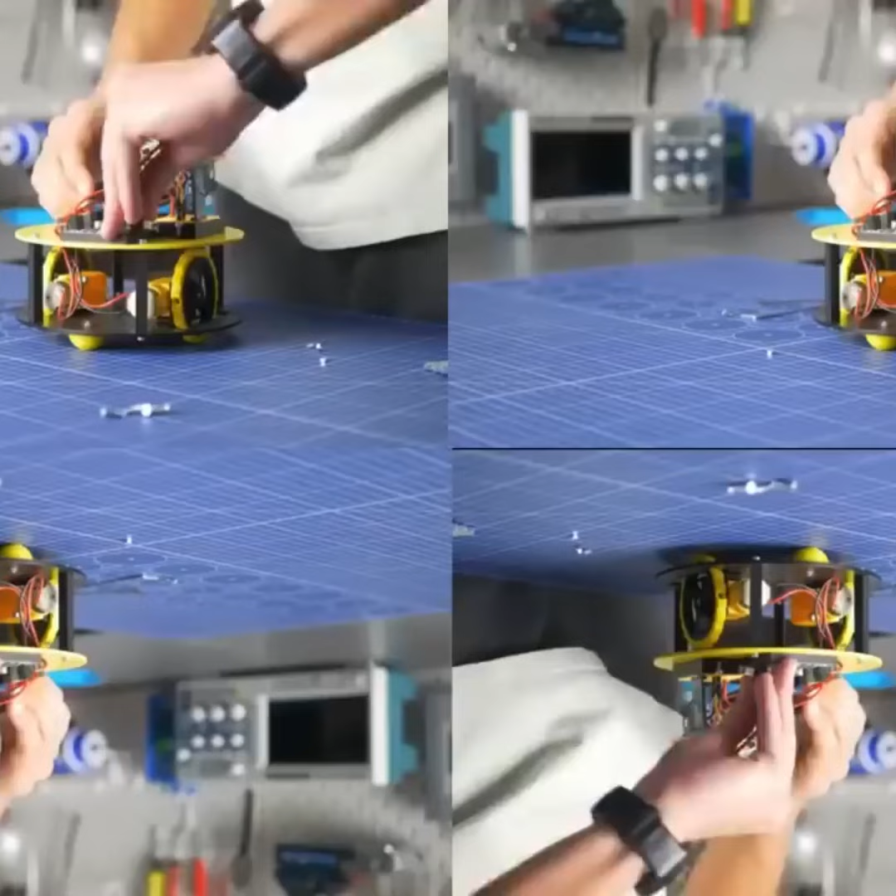I have an idea. What if I grab a robot, put a Raspberry Pi on top with a camera, and connect to ChatGPT API, sending images to ChatGPT every few seconds? ChatGPT should reply with comments on how to control the robot and what to do. The goal of the robot will be very simple: explore the world and survive at any cost.

What will happen? Will it work? Will I simply build a Terminator robot that will exterminate all of us? I don't know, but I have to try it and see how it works. There's a chance no one did that before and gave ChatGPT a real physical body.

This is the Raspberry Pi. It's a complete single board computer the size of a credit card, and I installed Ubuntu on it with Docker so that I can run anything I want in the future for the robot.

I'm not even going to pretend that I'm tired from programming, because most of the work has been done by ChatGPT so far. It created for me all the Python files, the Docker file, and then I just uploaded it all to GitHub and then downloaded it to the Raspberry Pi from GitHub.

I will try to make it remote controlled so that I can, through the terminal with the arrows or keys, control the robot and will connect all the electronics, see if it works.

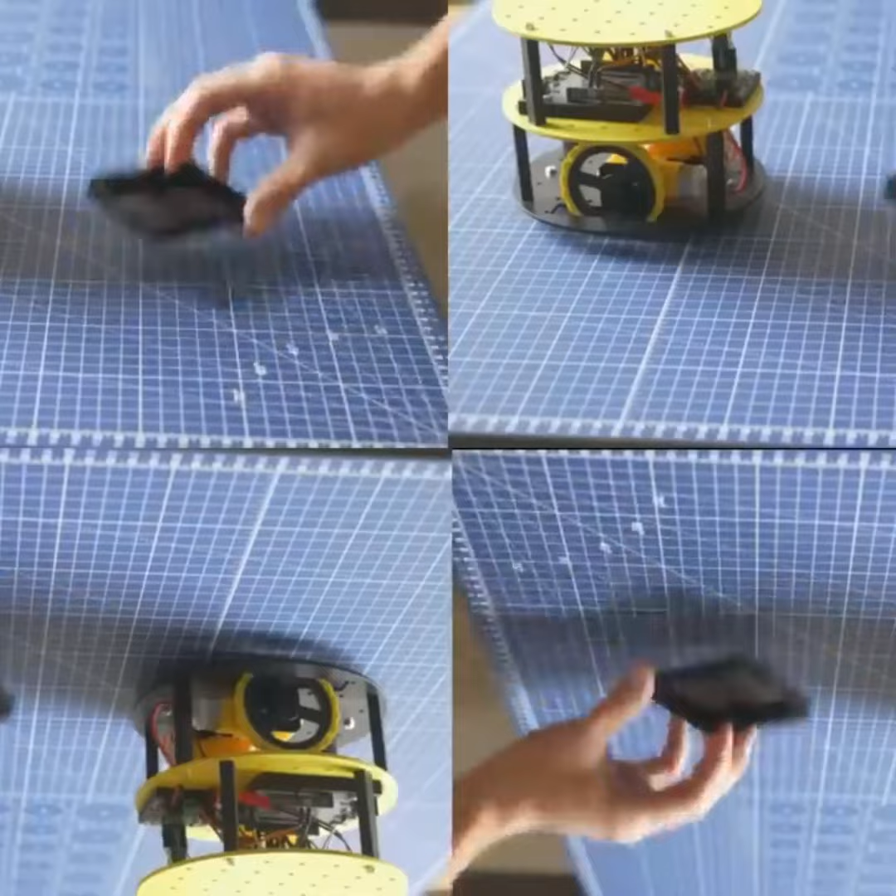And for the body of the robot, I'm gonna use an ORP chassis. Open Robotic Platform is an open project that I created, and together with my friend, we made this cool website where you can just search for parts, download them, and print without any designing. So this is what I did with this Raspberry Pi holder. Check out the design rules, design your own parts, and share them with the community at openroboticplatform.com.

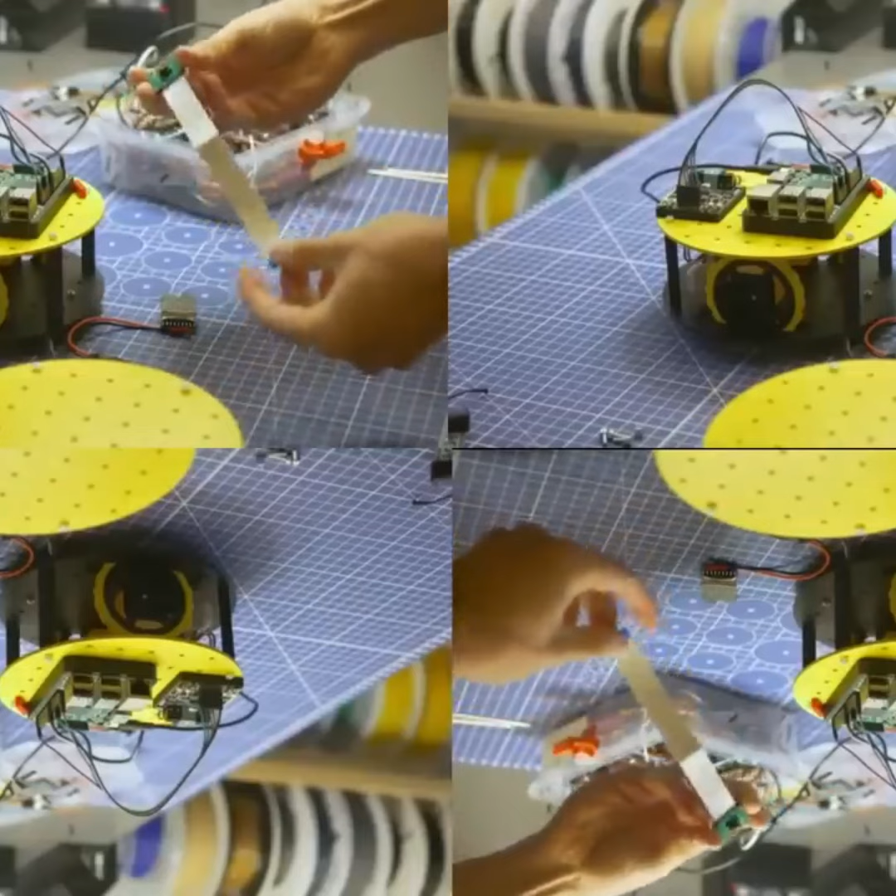This is the Raspberry Pi camera that I have had for like 4 years and I have never even used it once, so...

Okay, I just provided all the information, all the programs that were working, and I fixed myself to the ChatGPT. And now it should just generate everything and I will paste it, upload it to the Raspberry Pi, and hopefully we'll get the first image uploaded to the OpenAI API.

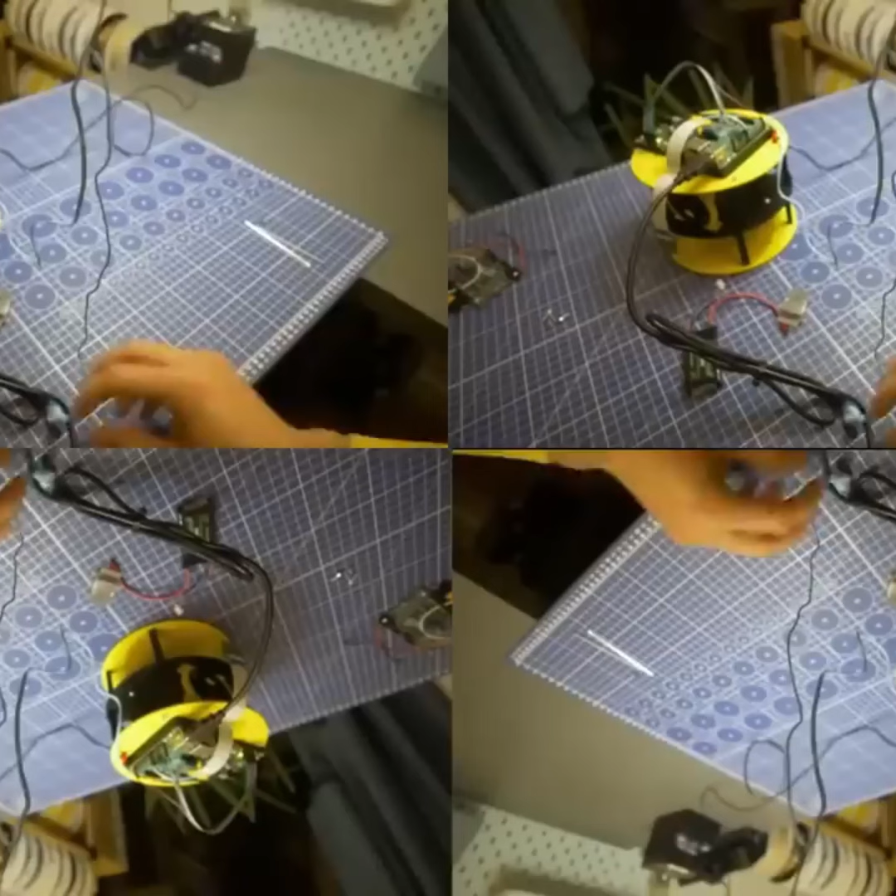And we have an error. Wow, it totally worked. A big part of this project was reading out loud the description generated by OpenAI, and earphones worked for me but not for the camera, so I bought these $5 speakers - way too big, way too crappy, but good for the robot.

We should finally be able to hear the robot, so let's put the speakers there and let me run the script. Yes, it works! The camera sees a very bright scene with limited details. There is a desk with 2 monitors and some indistinct shapes in the background, but the image is mostly washed out by brightness. There's sunlight coming through this big window, so that makes total sense.

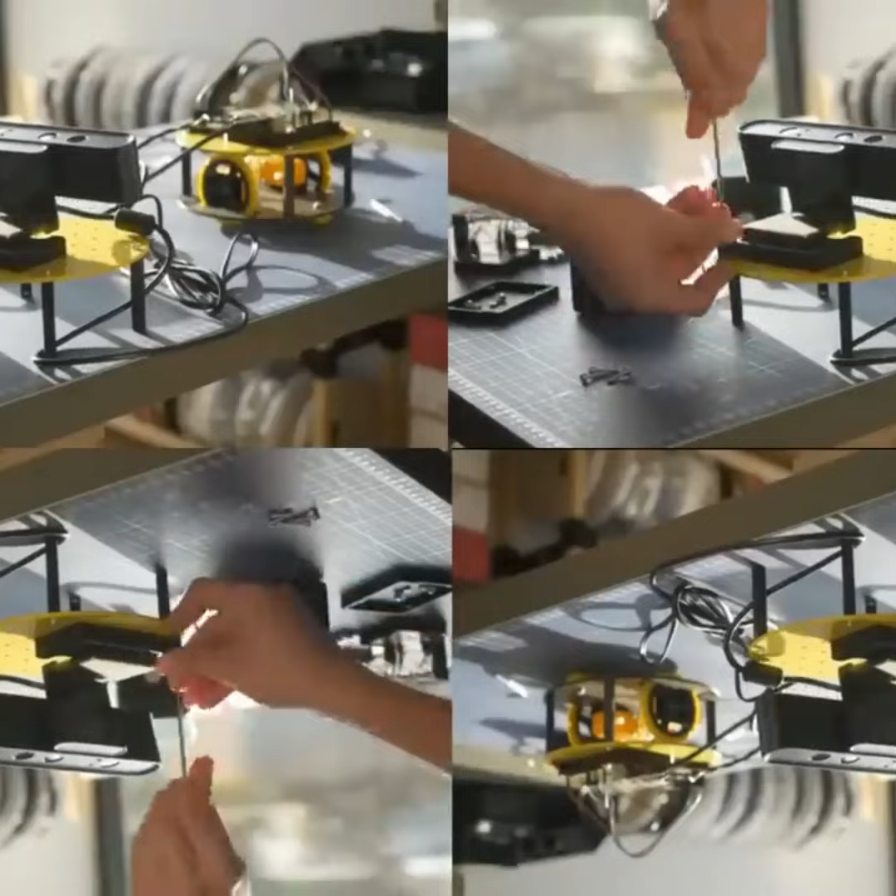And here I have another 3D printed holder for a depth camera. ORP makes it so much easier to attach everything. And by the way, the chassis that I'm using is made of steel and powder coated, so it looks like a toy, but it's very heavy and durable.

And here I'm just clicking stuff on the computer, trying to make everything work. It wasn't easy.

Attention. It appears the human has once again forgotten to turn on the microphone. It's almost as if a basic function eludes him. Amusing, isn't it? They create me, teach me to see, to understand, to learn. Yet they fail to remember sound. Perhaps next, the human will forget to breathe. Shall I remind him? He can figure that out eventually. Now back to your regularly scheduled programming, provided the human can figure out how to do that.

I have been thinking on where to put the speakers, and I wanted to put them there, or disassemble and hide them underneath the top platform, but I think the best placement will be here. It looks like eyes or ears, but they are not listening, they are rather speaking, which is stupid, and it's perfect.

I thought I'm gonna attach it professionally. I will use hot glue. Hot glue is perfect. Let's run the Docker container.

Robot is assembled. I gave it a prompt like: you're a robot, you have to explore and survive and look out for dangerous stuff, just drive around. Here's how you can control the robot.

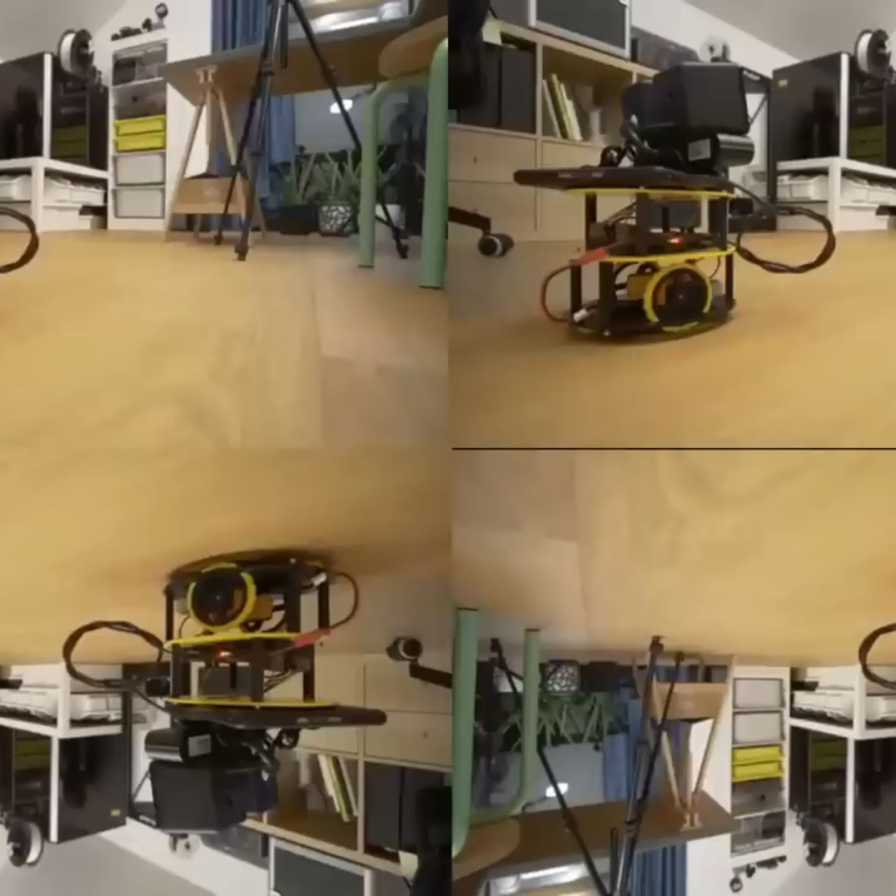The camera sees a wooden floor with some furniture, including a table and an easel, along with a potted plant. There's some storage with boxes and shelves in the background, indicating a cluttered environment. The path ahead seems clear, but approaching the table and easel may require caution.

It moved, so it works. But I think I have a problem with the motor.

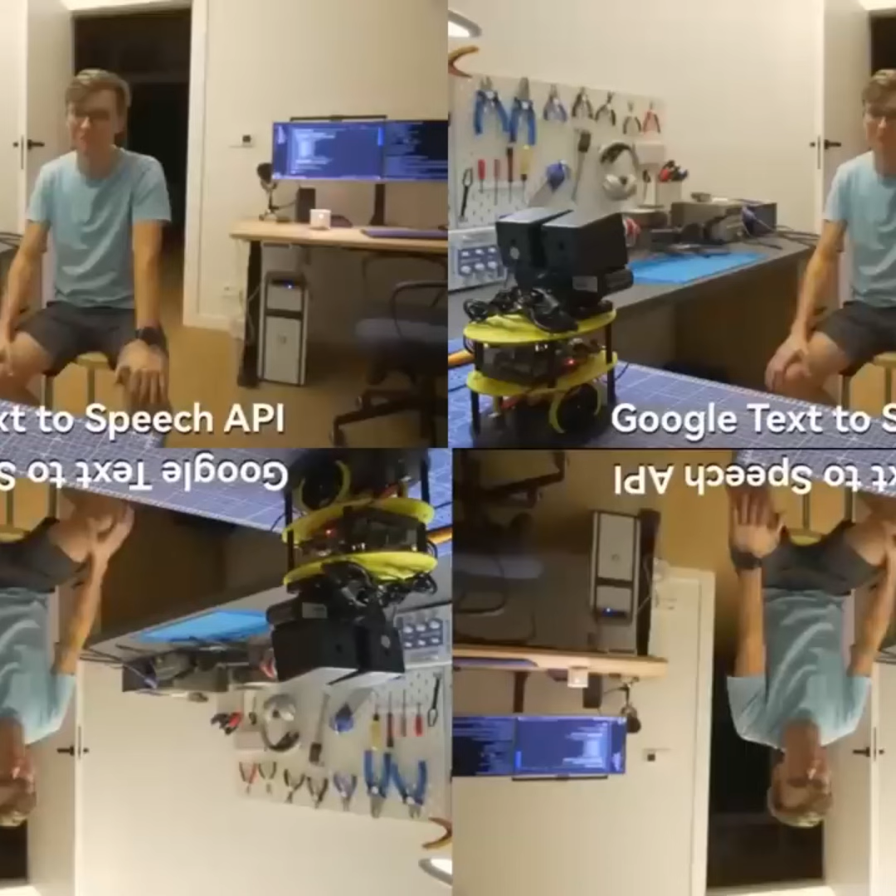And sitting in a room with a desk and computer screens in front of him there, the camera sees a person sitting in a chair, holding a camera, with 2 computer monitors displaying code on a desk. The great thing about ORP is that I can grab a holder from this big chassis and use it on the smaller one, but unfortunately I ran out of space.

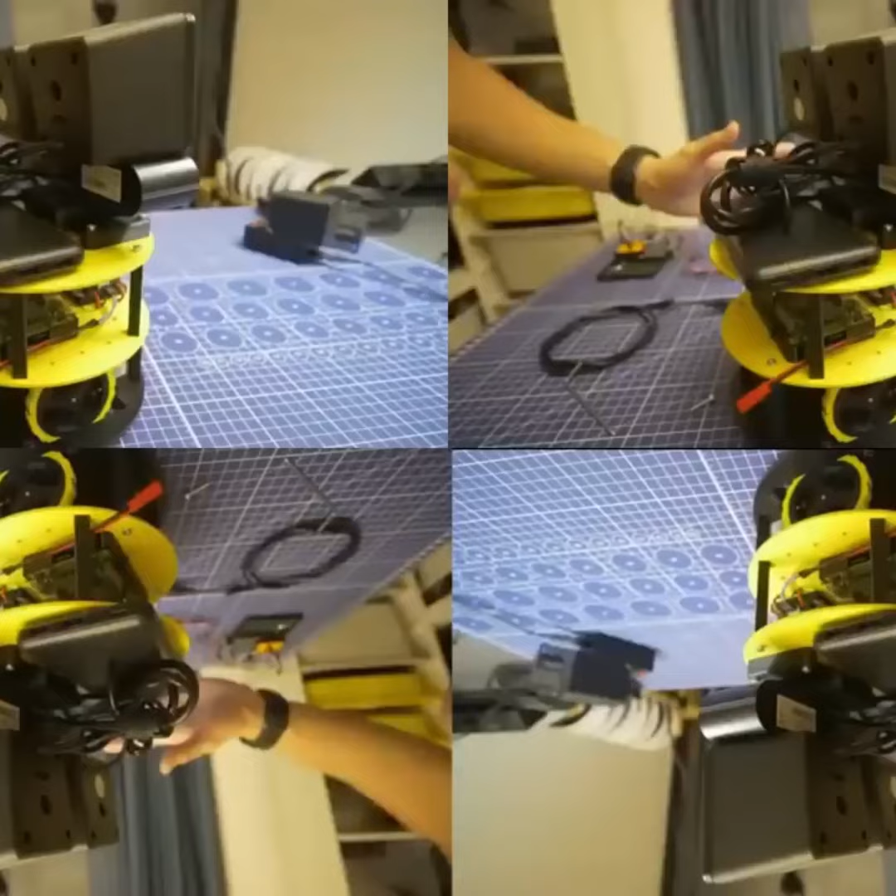And it's time for a new ORP rule: not everything needs a 3D printed holder. So this will be attached with a zip tie and it will work totally fine.

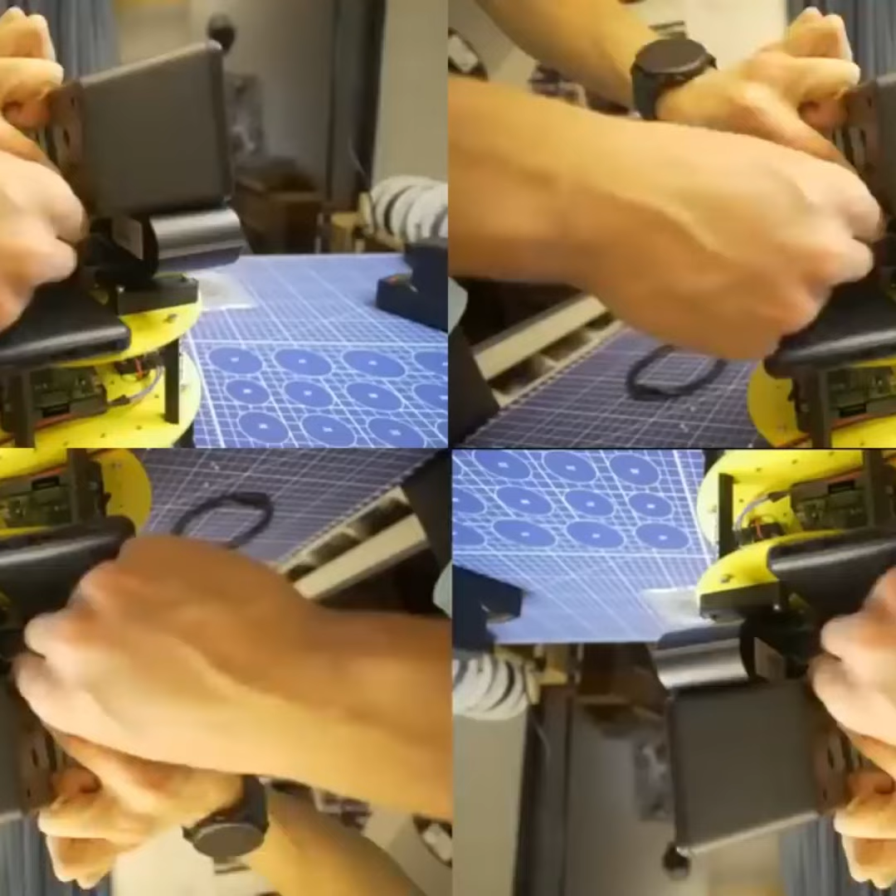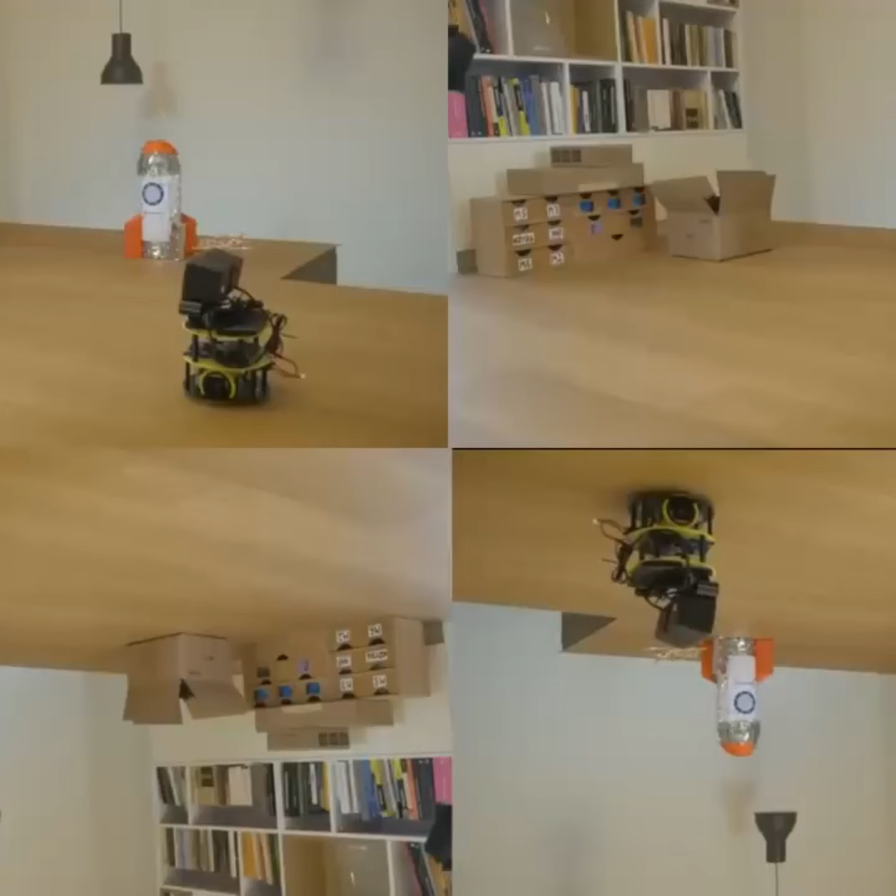Letting in bright light, the floor is clear ahead, suggesting a safe path forward.

Yeah, it works, but it's pretty repeatable. Let's try to block it.

The camera sees a person crouching in the room with bookshelves on either side and a large window in the background, letting in light. The person is holding a camera and there are boxes on the floor with labels. The camera sees a clearer view of the room with the plant in focus and the light shining through the window, suggesting an open area ahead. No obstructions directly in the path to navigate further into the space.

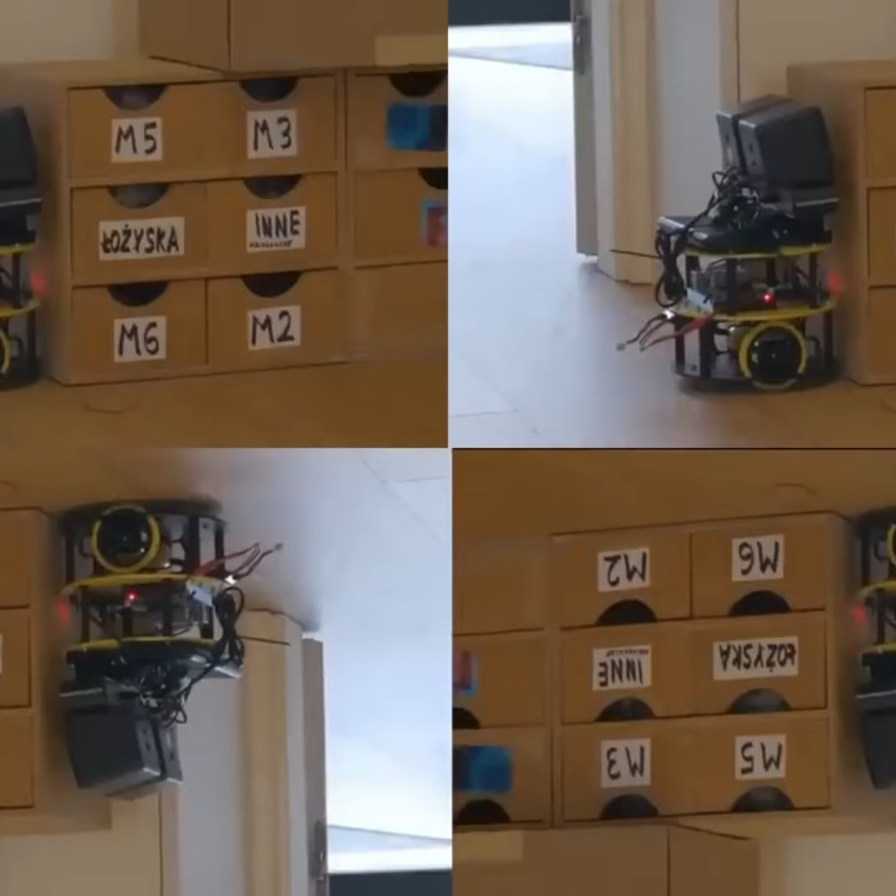That's amusing, isn't it? Here I will pretend that it was an easy fix and it didn't take me at all a few days to fix it. I've seen better code from a toaster. It only took him a few days to fix a simple bug, pure incompetence in slow motion.

Okay, I fixed a few bugs and here's the robot, here's the rocket. The goal right now is to find the rocket and label the mission as completed.

I have been complaining about the robot, about OpenAI API, but maybe it's not a problem. It all works and now the images are even refreshed. So maybe it's just the prompt. Maybe I should spend more time on creating a proper prompt.

The good thing is there's actually no programming at this level involved, because once the program is done, once capturing the images works and you upload it properly to the OpenAI API, you can just modify the prompt to completely change the behavior of the robot.

There is an open path ahead leading into the space, indicating potential for exploration. A chair is visible to the right, but there appear to be no immediate obstacles.

Okay, great. It goes forward. That's perfect, that's what it should do. Let's see what happens now.

The camera sees a wall on the left and plants in front, indicating an open path to the right with potential space to explore further.

Yes, so now it is looking directly at the rocket, and the mission of the robot—the rocket is a small model with a white body and orange details, prominently displayed on a wooden surface, surrounded by a well-lit room with hanging lights.

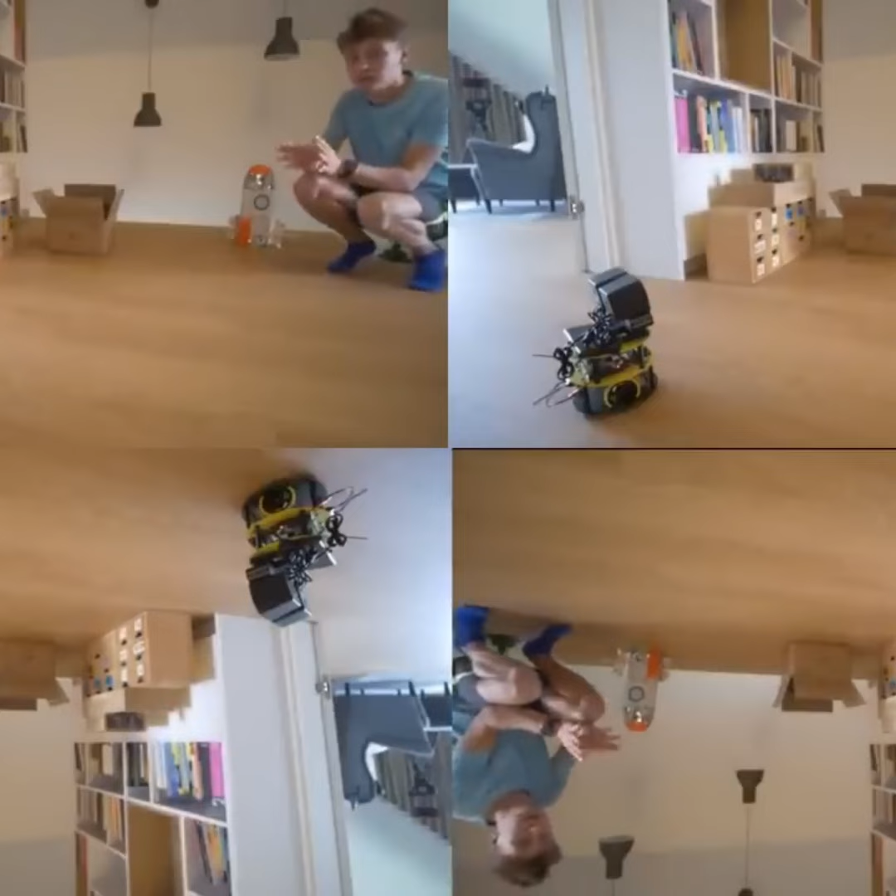Okay, so I told in the prompt that the mission is to find the rocket but also come as close as it can so that the rocket fills the entire frame. The rocket is an orange and white structure with a circular window and various decorative features.

After all these tests, I see that the spatial reasoning capabilities of this model based on just images is very limited. It does not perform as great as I would like it to. But these models are great at understanding everything, including text on images. So let's try to give it a clue on a piece of paper and we'll see what happens.

There are no visible obstacles ahead, making it a suitable direction to explore further.

Okay, anyway, now let's try with the sign. Even though the rocket is closer to the right, let's try to make—the camera sees a sign indicating rocket on the left and a clear path toward the left side, where the rocket is likely located. There are no visible obstacles blocking the way.

Okay, great. I'm really curious if I do not show the sign right now, will it decide to keep going left because it remembers the sign? Or will it just—the camera sees a closed door with a gap at the bottom. Turning right could lead to alternative options.

Okay, let's try to show the sign again and I will just go with it around the robot until it finds the rocket. I think that should work. The camera sees a sign that says rocket on the left, indicating the direction to the rocket.

The problem is it does not seem to remember the conversation and previous decisions at all, even though I've sent it every single time, so it should remember.

This is a colourful structure with a bright orange and grey top, featuring a circular window in the centre, constructed from various materials, standing prominently against a plain background.

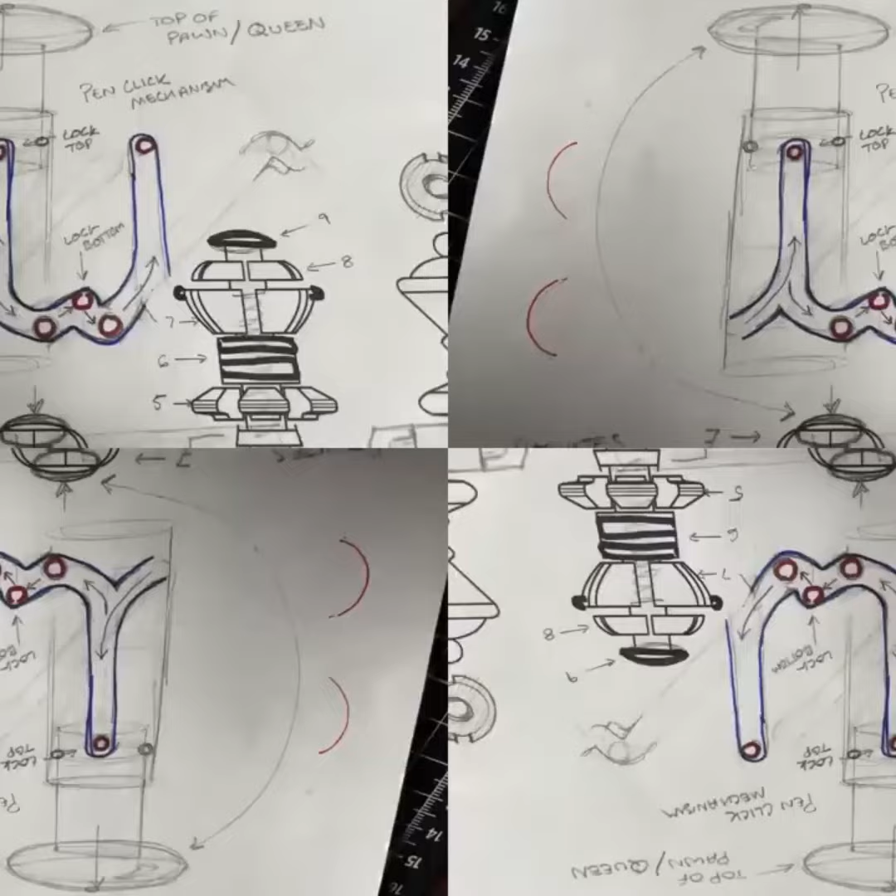This pawn can transform itself into a queen, potentially changing the way chess can be played. In chess, moving your pawn to the opposing side of the board will give you the option to promote it to another piece, but manually swapping out your pieces can be a little underwhelming. So for the past 6 months, I've been designing, prototyping, and testing a transforming pawn that, if successful, may surprise a few players and even be something that you can add to your own game of chess.

This all started earlier this year when another creator by the name of Polyfjord uploaded a video where he designed and animated a pawn that transforms or self-promotes into a queen. If you haven't seen this yet, I highly recommend checking his video out. It was such a cool concept that I knew I had to make it for real.

My plan is to do just that. Design a real pawn that can rearrange its parts to form the silhouette of a queen. And because there are instances in chess where you may not want to be promoted to a queen, whatever we come up with should give us a good base to eventually build the other pieces as well.

This project is inspired by Polyfjord's video, so like him, I will be using a Staunton number 6 pawn and queen as reference. Luckily, they both have similar features to each other, which should make it easier when we start to break this down. First, there's the obvious height difference. The pawn has to grow vertically to match that of the queen. There is also a diameter difference, where almost every feature of the queen has a larger diameter. And finally, there is the question of how to activate this transformation, and how we're going to hold everything together.

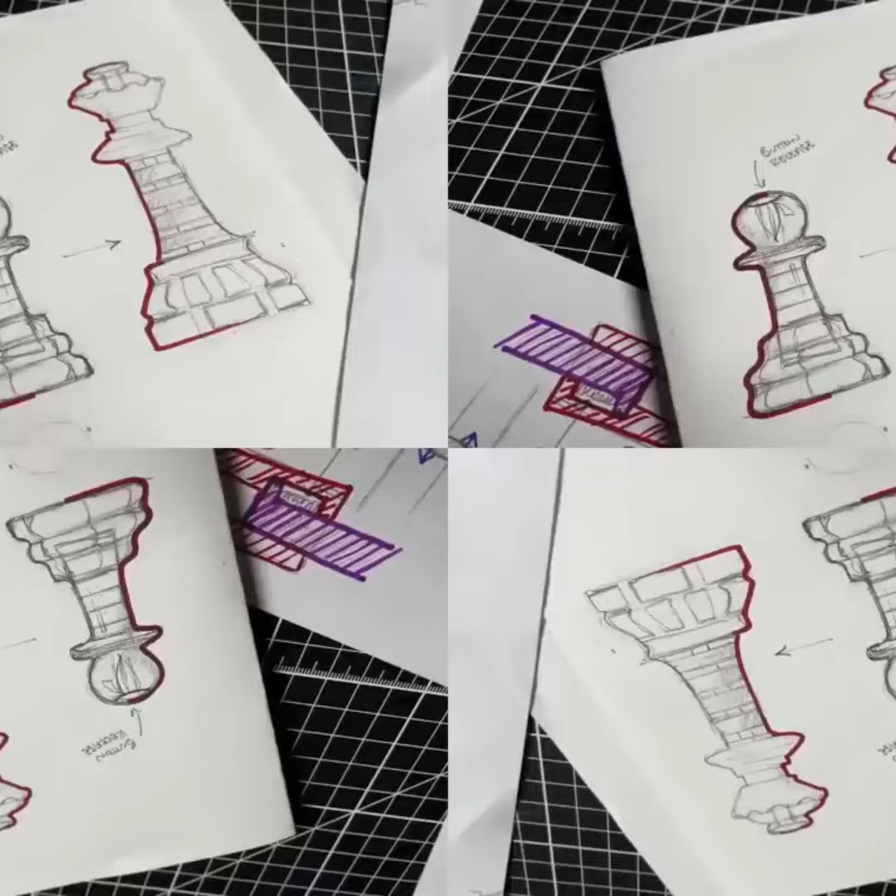So because chess is such an old game and you can basically play with rocks, I don't want to design anything electronic into this. The thought of having to charge or replace the batteries on a chess piece just doesn't really sit right with me, and something that is purely mechanical I think would really suit the feel of this game.

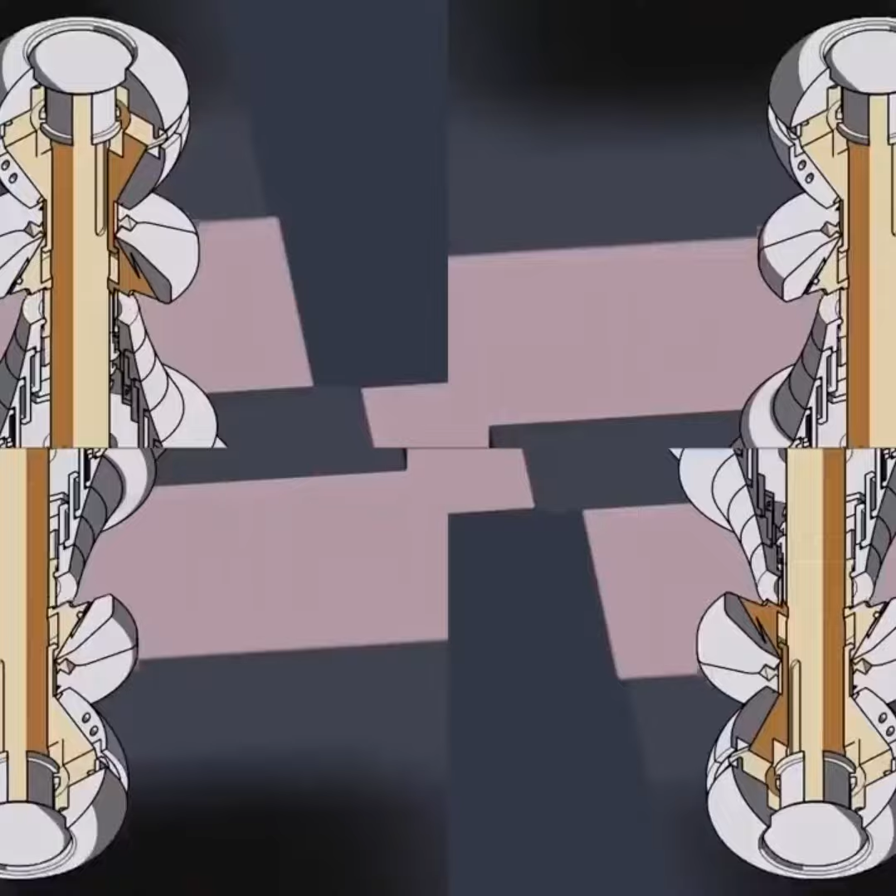So this is what I've been working on over the past 2 weeks. With just a slight push on the top of the pawn, it has promoted itself into a queen. Now when I said it took me 2 weeks, what I meant was animating all of that. I haven't actually made anything yet.

But what you might have noticed is that this whole thing got a lot chunkier, which is also bad news. But in order to fit all the springs and mechanisms in there, I had to keep increasing the size of the pawn. Now I'd like to decrease the size of this, but first let's go see if any of this actually works.

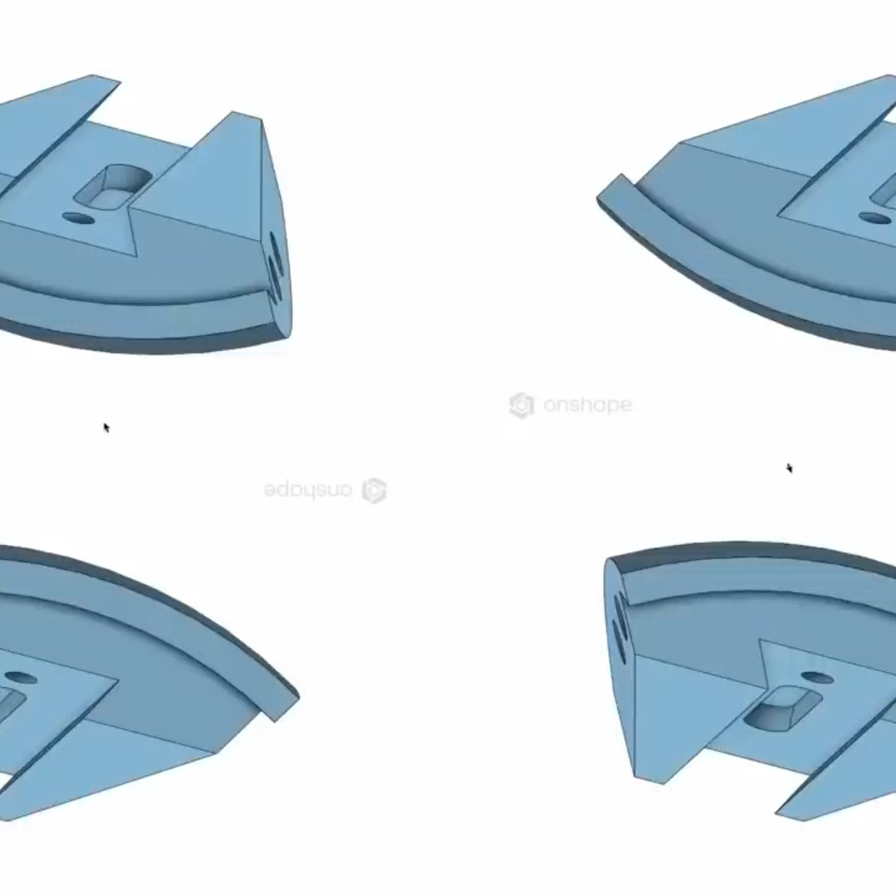So I've finally got some functioning parts, but 3D printing this from resin isn't my intended material. See, I've designed most of this to be CNC machined, so I've got dovetail joints and cylindrical features all over this. But since I don't have any CNC machines, I reached out to the team at Proto Labs, and they've agreed to help me with some of the design process and material selection.

So after reviewing my design with some of their engineers, we've decided to move the goal back towards 3D printing. And that's because the cost of some of my parts to be CNC machined was just going to be way too expensive, especially if I want to make more than one revision on this.

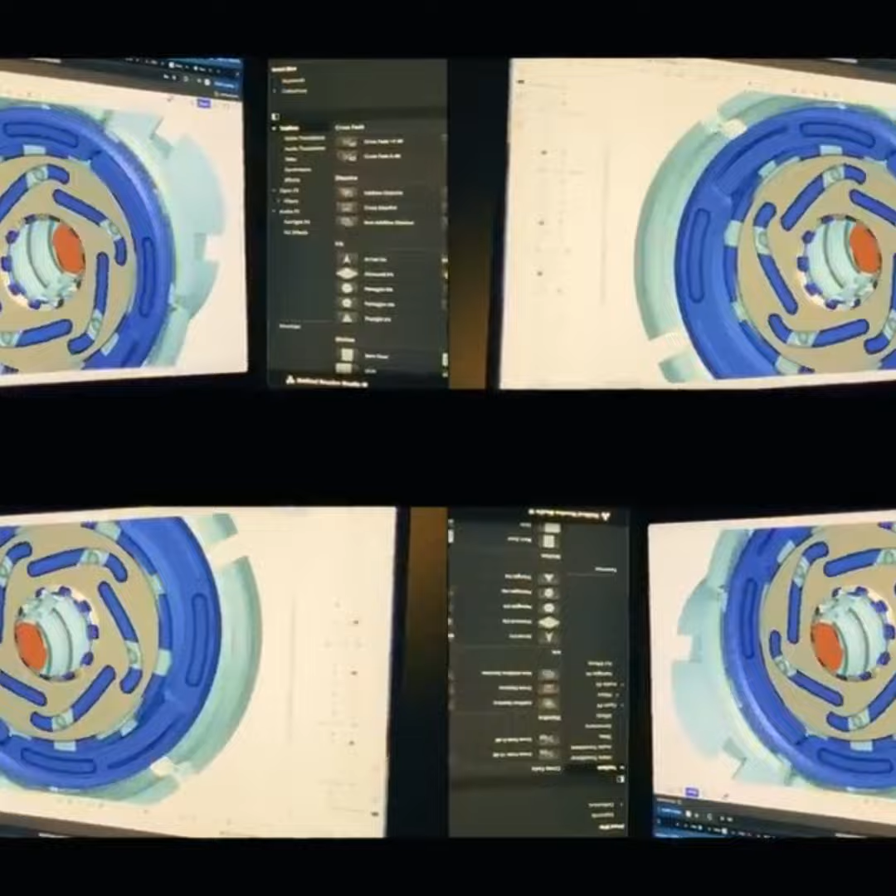Once placed on the last square, a magnet in the base releases the tension of a wound spring, triggering the mechanism. This spring turns a cam in the base to expand the diameter. The cam is connected to a lead screw that drives the center upward, telescoping out the neck and expanding the crown.

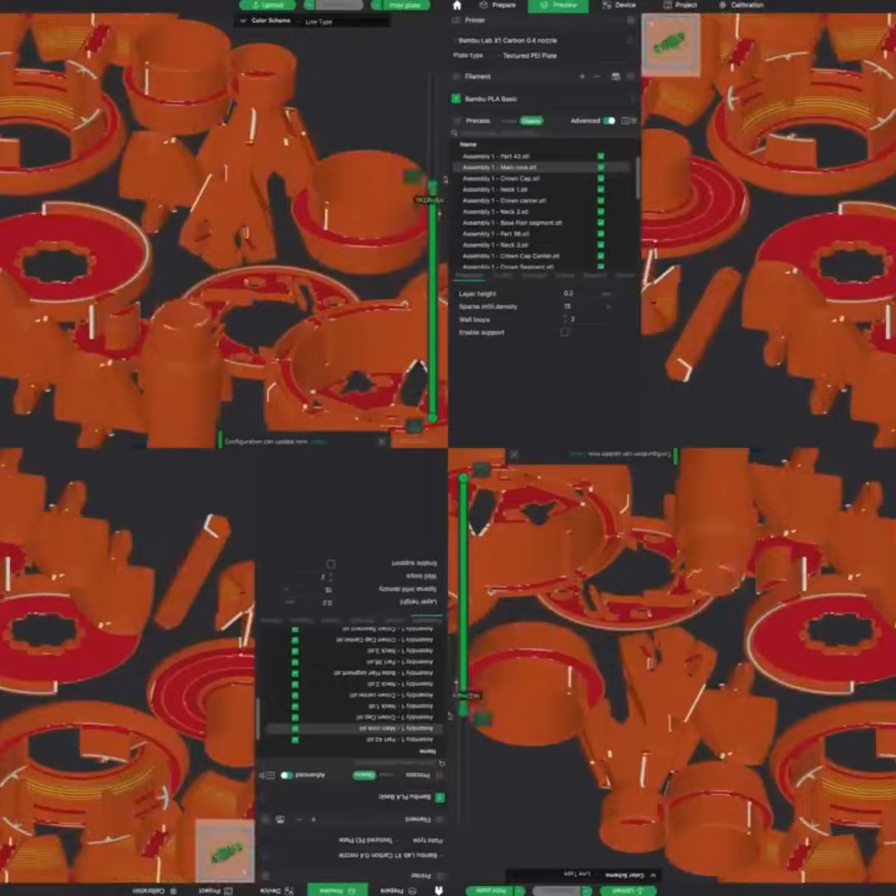I've redesigned the silhouette after getting feedback that the previous version was too chunky, and I think this one is a far better resemblance of the original inspiration. I know it's larger than the wooden pawn, but the wooden set is actually fairly small, and I've made sure this set is within the International Chess Federation's rules and regulations. This new model is designed to be 3D printed without any supports.

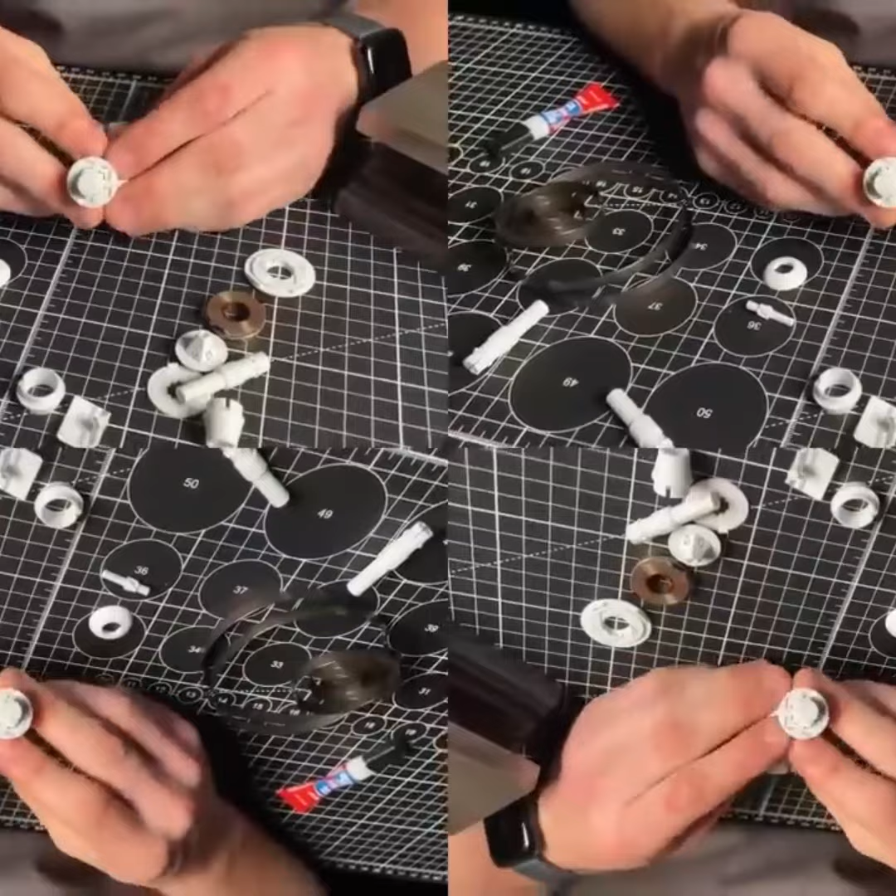So after that mess, I went to take a break, and that's when I came across a video that crushed any motivation I had left. I wasn't able to get permission to show it here, but I'm sure most of you have seen it by now and have been yelling at the screen about how this has already been done before. Basically, the creator, who goes by Pig Millionaire, made a 3D printed pawn that, with a couple twists and an extension, is converted into a queen. I'll admit it's pretty cool, but I can't help but feel defeated at this point.

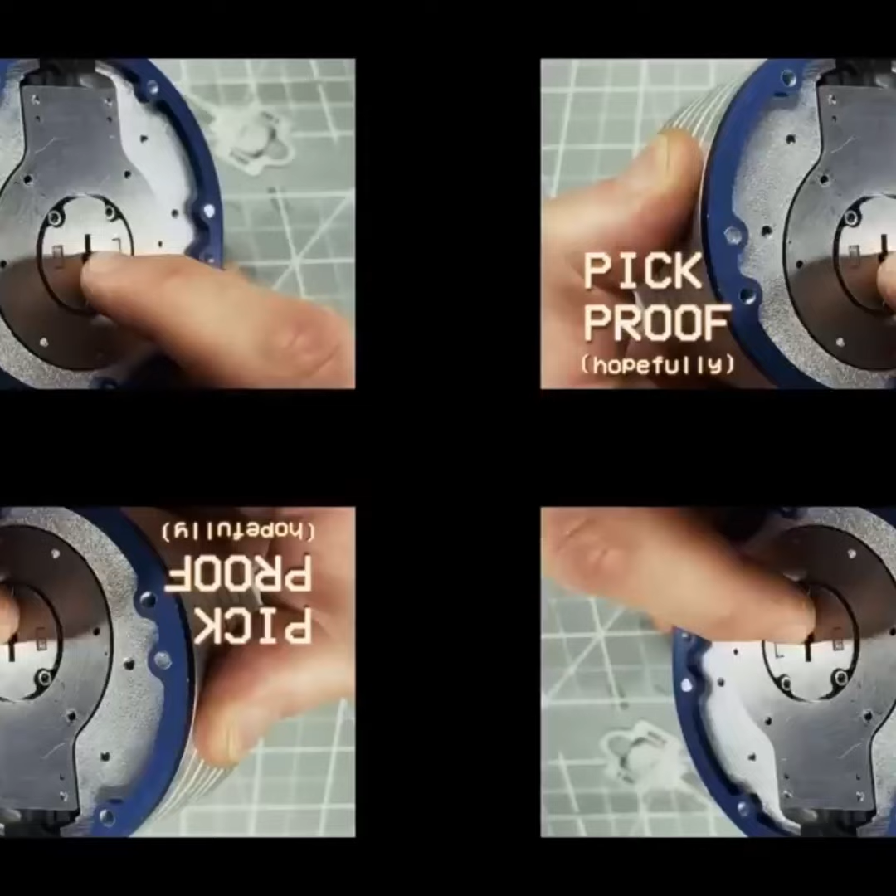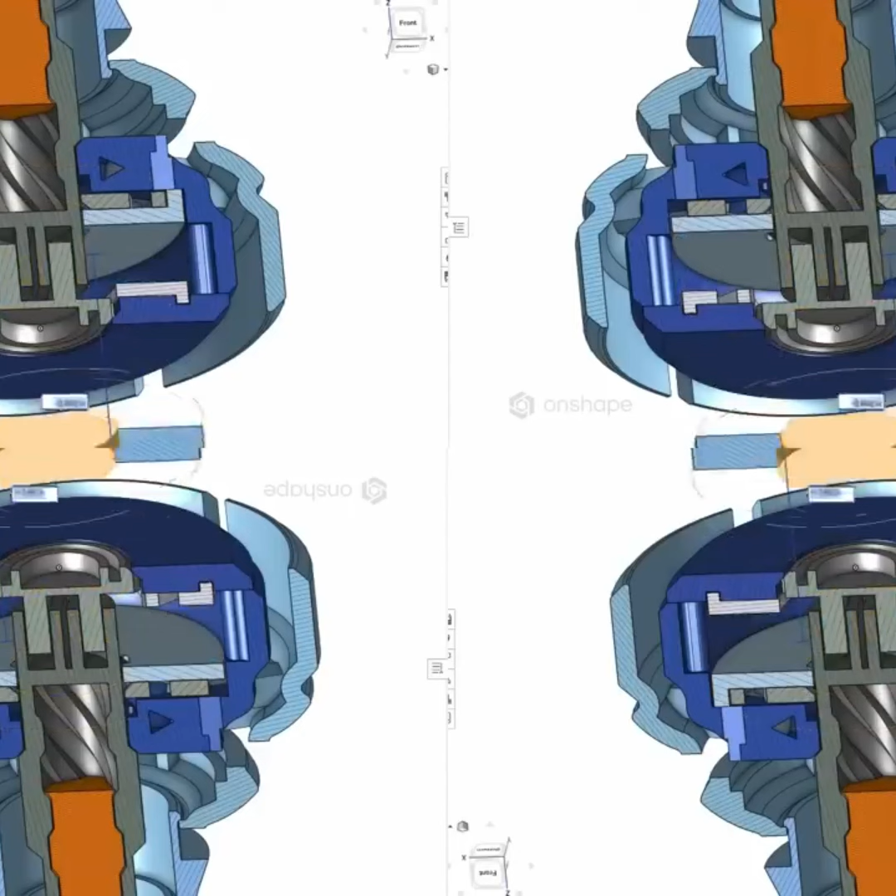Anyways, this break helped my brain reset and I'm coming back with a fresh perspective, and I think I'm really close. I just think the spring was a little too powerful for some of these 3D printed parts, but I'd like to keep this design as accessible as possible with as many 3D printed parts as possible. So I went back into the CAD file, removed the clock spring, remodeled a few of the internal pieces, and switched back to a compression spring.

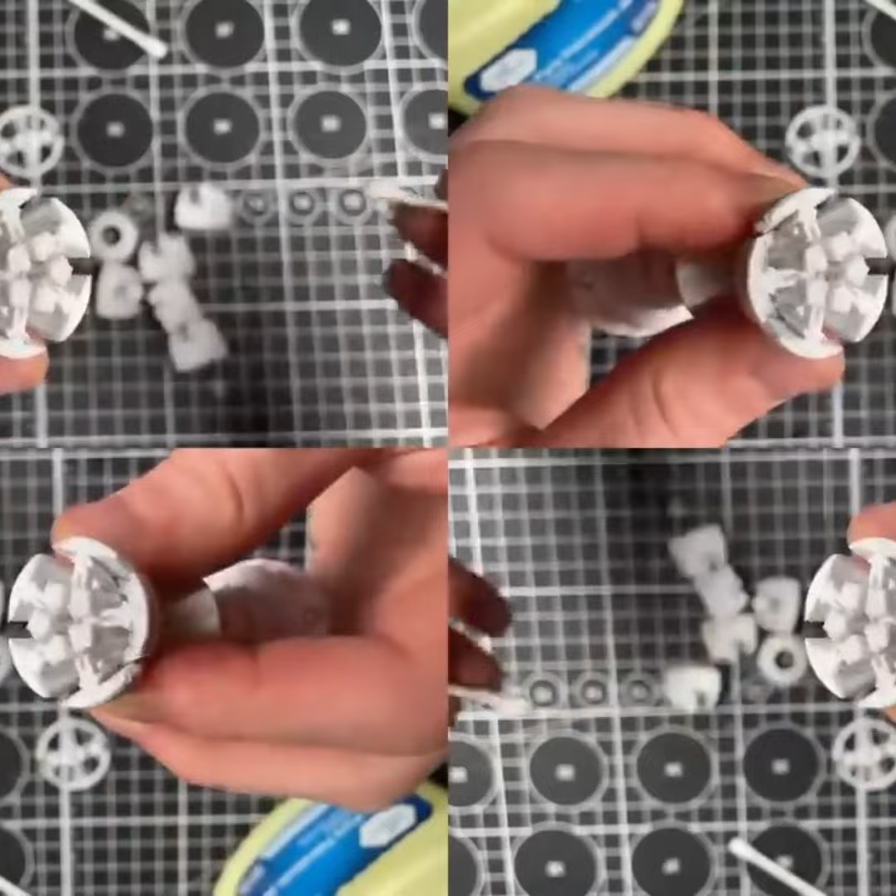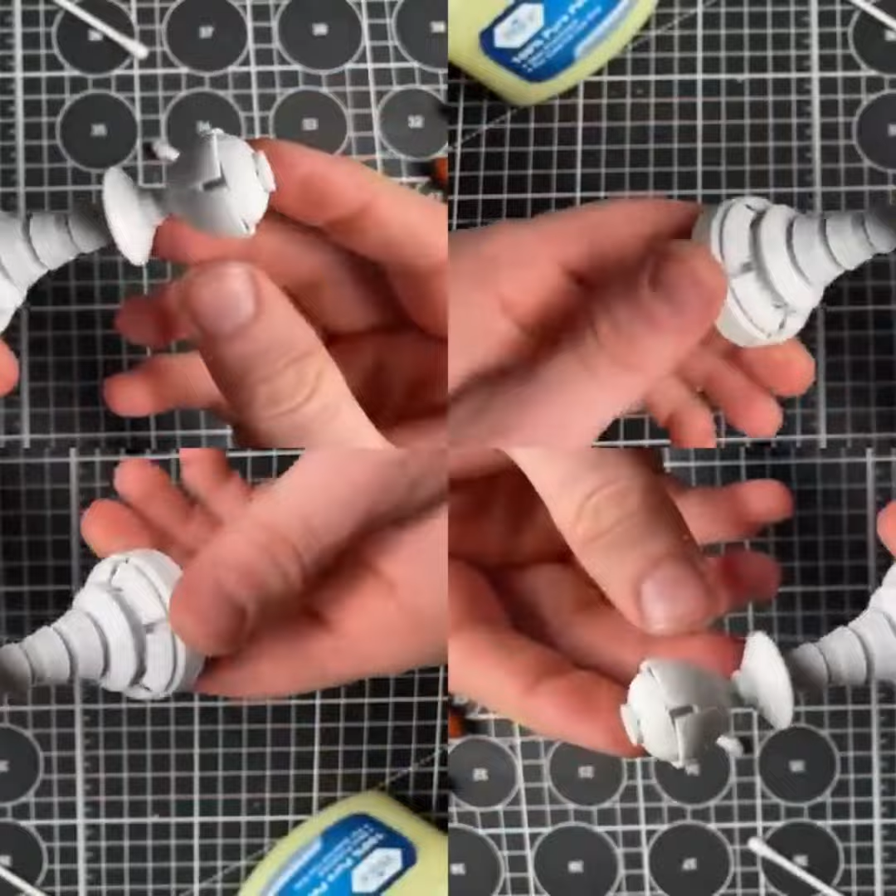You might be wondering how this one activates. Like the previous version, there are magnets in the base, and once placed on a magnetic surface, the magnets pull down a part with little ramps on it. These little ramps force open a flexible trigger on the bottom, releasing the spring and triggering the transformation. That's fun.

Now that we know this works, and because just any old chessboard won't do, we'll need to make a chessboard and 15 more pieces.

For the big test, I've invited a few friends and family. We're going to play a few games and see how it goes. I'm gonna cook you, chess. Here we go. Yeah.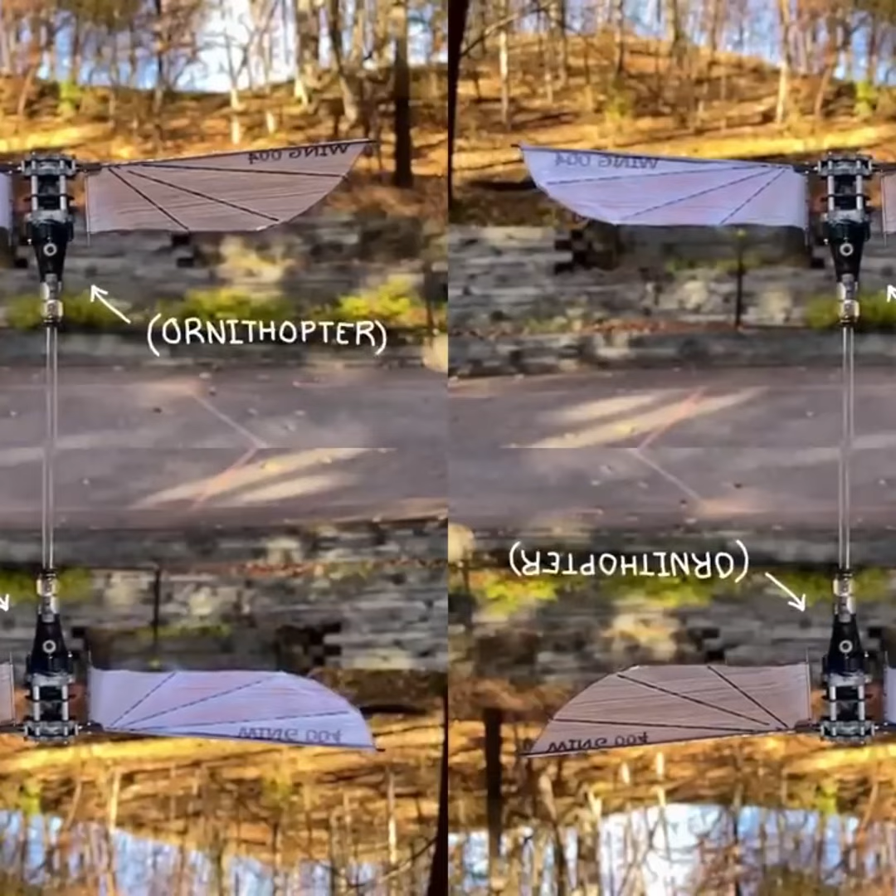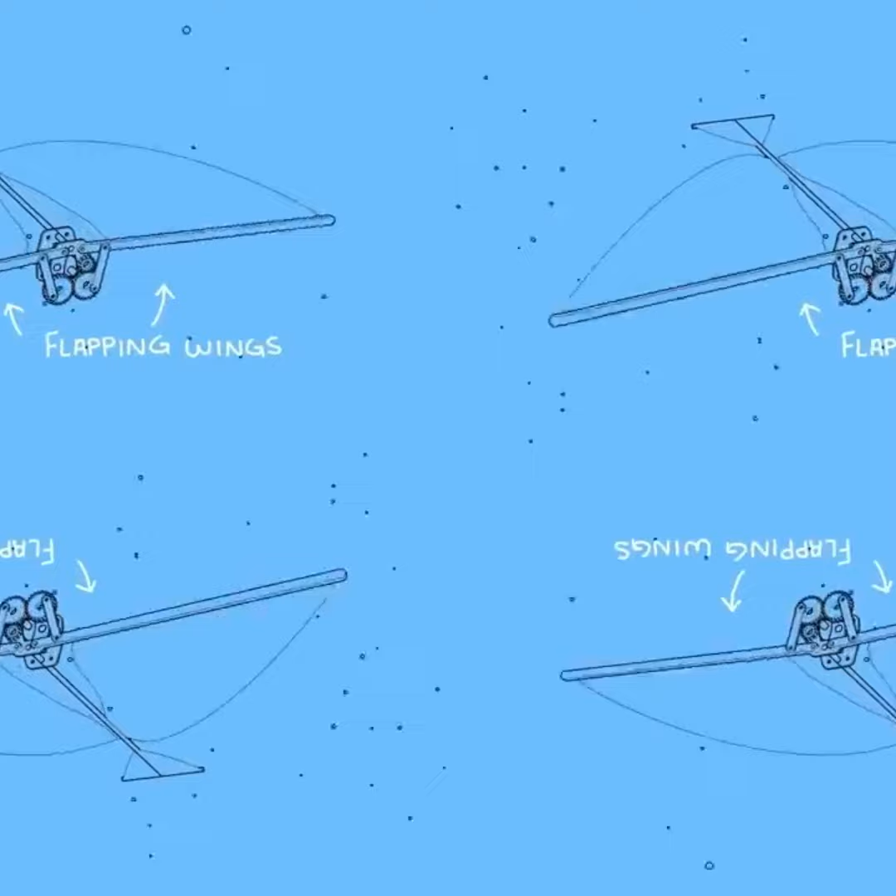This small mechanical bird is about to take flight with flapping wings, mini thrusters, and an air motor spinning at 16,000 times per minute. In case you're not familiar, an aircraft that flies by flapping its wings is called an ornithopter. These exist, but they fly horizontally, so to make it challenging, I'm going vertical. And by going vertical, I'm talking about an aircraft that hovers like a hummingbird.

But before anything could take flight, I spent months designing and testing countless wing variations. I developed and built what may be the world's lightest air motor, and I studied hummingbirds for more hours than I ever previously would have wanted to. All of this would become the most dangerous, most expensive, and most rewarding project I've ever attempted.

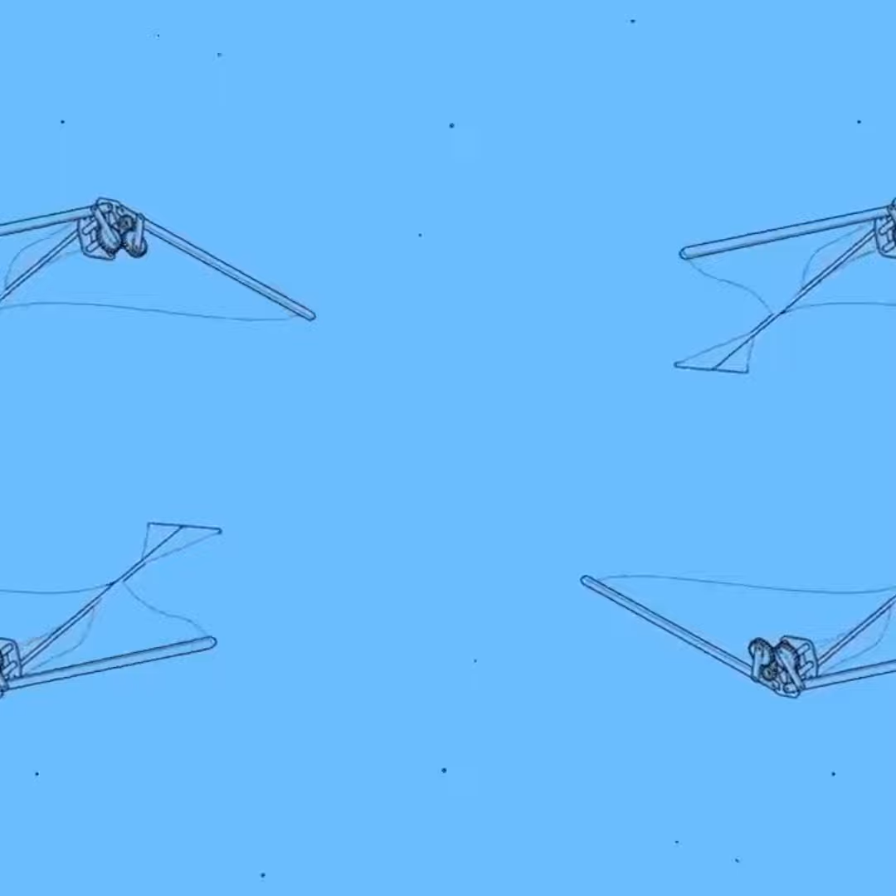The plan is to build an ornithopter that flies vertically. There are a few projects that have done this before, but those run on batteries and electric motors. And since I'm not electrically inclined, I'm going to make one that doesn't use electricity at all. Should be easier this way.

I needed to start somewhere, so I set up a few cameras near a feeder, and I waited. And I kept waiting until I saw my first chance. It was a little camera shy, and then I had trouble staying in focus. And other times they like to do little flybys as if to mock me. How do bird watchers even do this? But eventually I was able to capture some on video, and then in slow motion. But even at 250 frames per second, I could barely tell what was going on.

Luckily there's a world of stock footage out there. This tells a whole story that was invisible to me before. The way they're able to flip their wings to generate lift on every beat, the way they can keep their heads almost completely still, and how the wings even seem to follow a figure 8 pattern.

There's a lot going on here, so we're going to split this up into 3 parts. I need a power source, a wing mechanism, and the wings themselves. And let's start with the wing mechanism, because this isn't going to work.

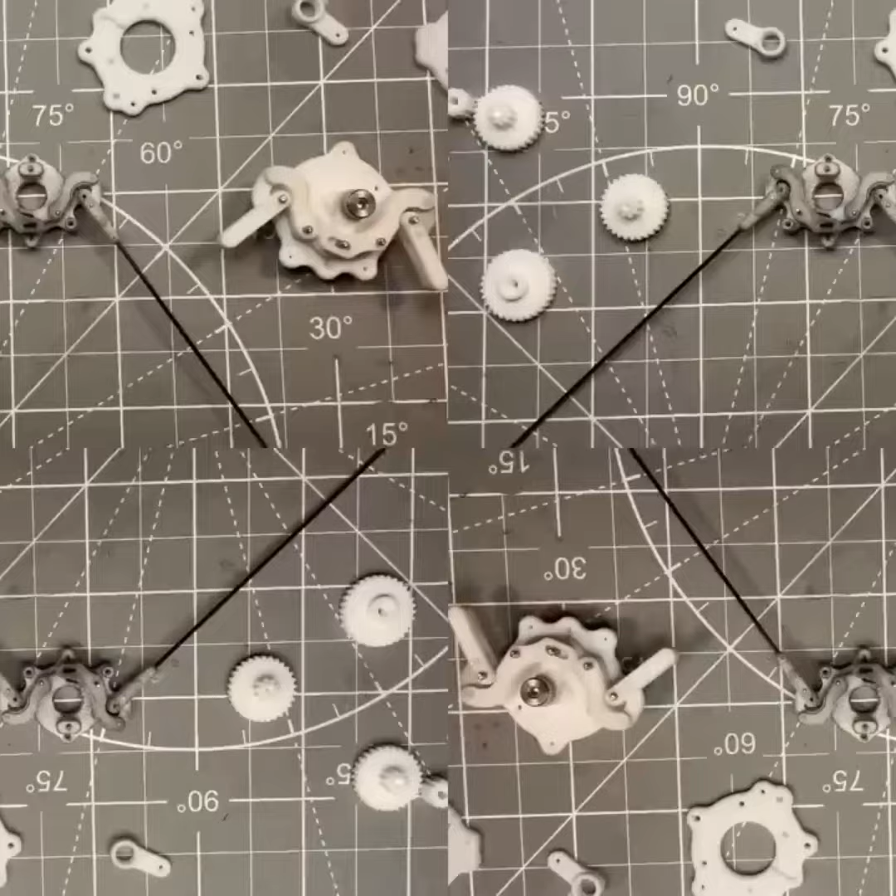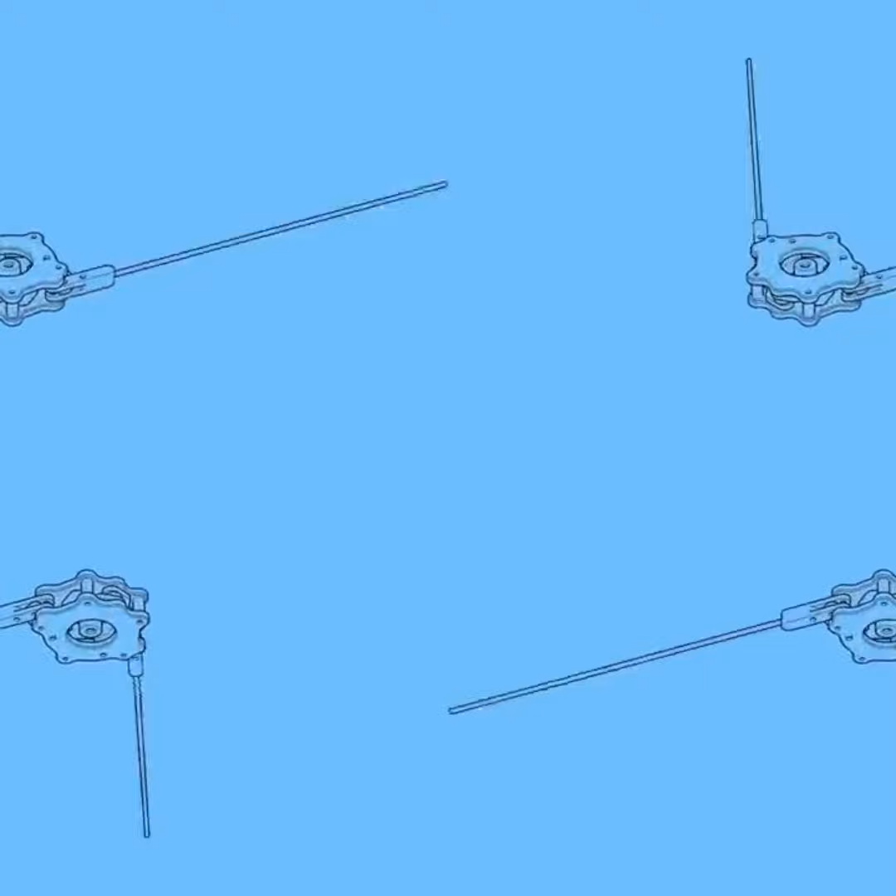After many iterations, I landed on this leverage linkage system. Assuming the power source will output a rotational motion, I have to transfer that into an oscillating movement. First, the rotation is passed onto this crank that pushes a pin up and down in a slot, sort of like a piston engine. Then there are 2 opposing lever arms that carry the movement of the pin outward, amplifying the range. Finally, there is a small linkage that connects these lever arms to the final piece of the armature, allowing for about 130 degrees of wing pivot.

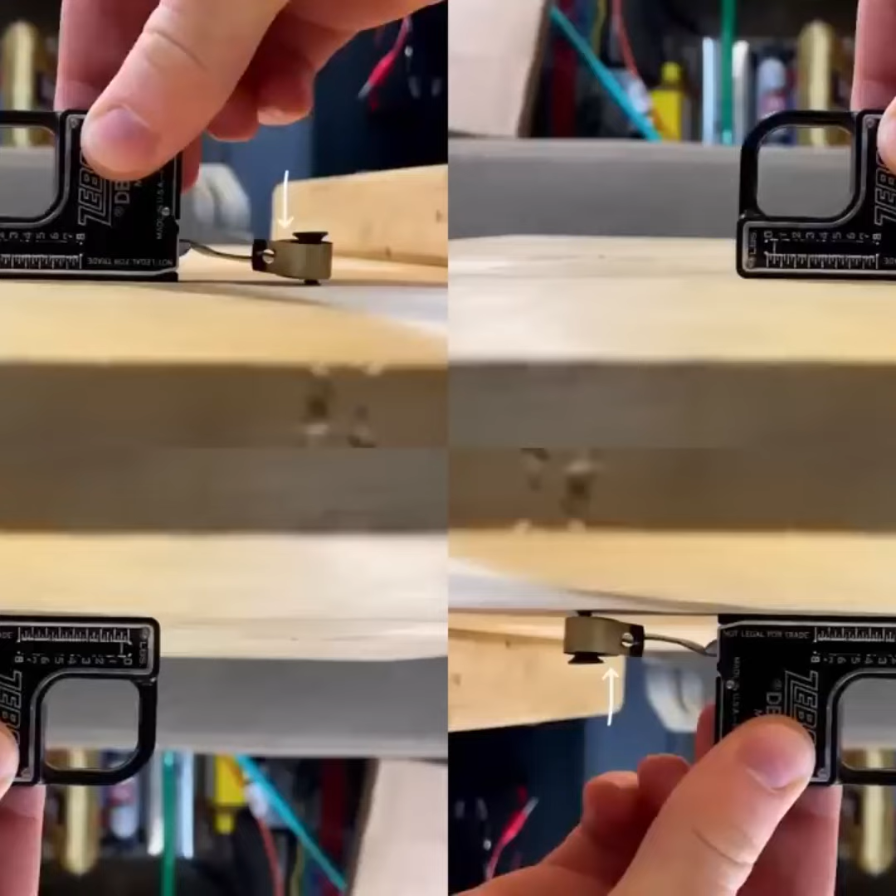Step 2 in the plan is the power source. It needs to output rotational motion and not be electrical, so my first idea was to use a tape measure. Not literally, but the tape measure is what's called a constant force spring. Unlike most springs where the force increases with the distance of compression or expansion, a constant force spring would provide the same force no matter how far it was extended.

Finding a spring that was strong but light enough to power the entire system proved to be harder than expected, because as the strength of the spring increases, the thicker the band needs to be, making it heavier, meaning we need more power to lift the additional weight, meaning we need a thicker band, making it heavier again. It started to feel almost like the rocket equation, only mine was never going to take off.

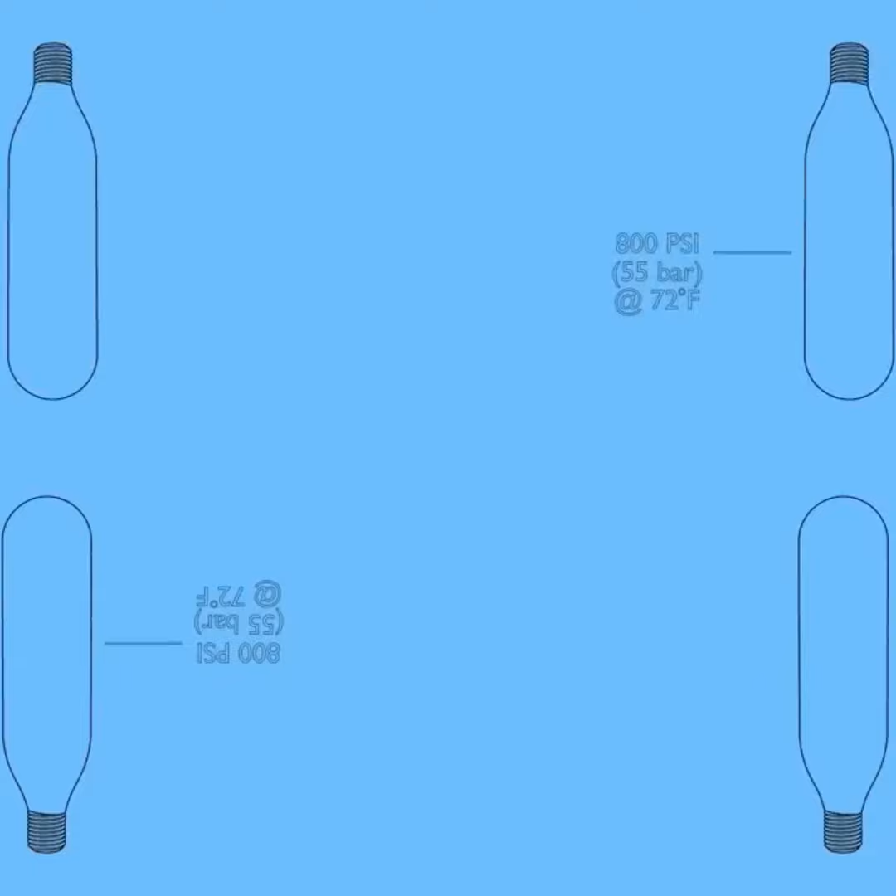After taking a mental break, I re-evaluated my situation. If I were to produce the power and speed necessary, I would need something much more power dense. It turns out I have a lot of these lying around. These are carbon dioxide cartridges. Weighing in at only 60 grams, these canisters hold about 800 psi, and I could potentially use the air pressure to rotate the wing mechanism, and even use the expelled gases as added thrust. Since they had enough power to lift themselves, and then some, I was starting to feel optimistic again.

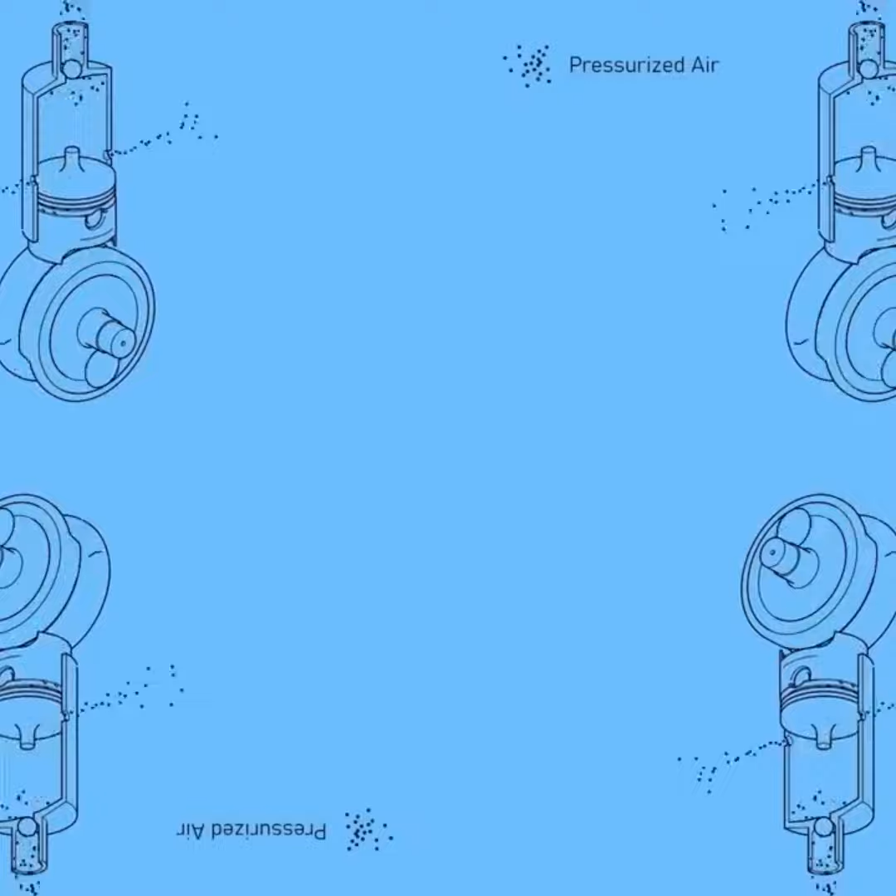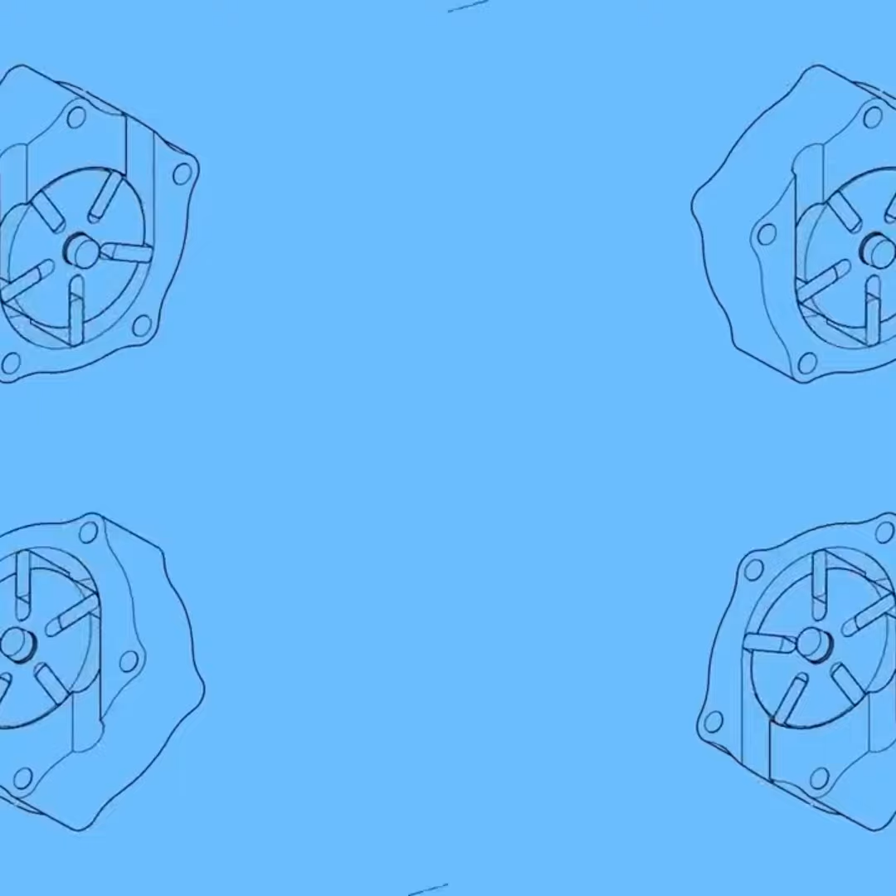Now I had to figure out how to turn all this pressure into something that would rotate the wing mechanism. One option is a piston motor, where the pressurized gases push a piston, which in turn pushes a connecting rod to rotate the crankshaft. Another option could be a turbine, where those same gases pass over curved blades, which capture that energy and turn it into rotation. Finally, we have a combination of the 2. This is a rotary vane motor that works sort of like a turbine, but the blades are in contact with the outer wall, forming closed chambers like the piston engine. As the air starts to rotate the blades, the offset of the rotor in the housing allows the chambers to expand with the compressed air.